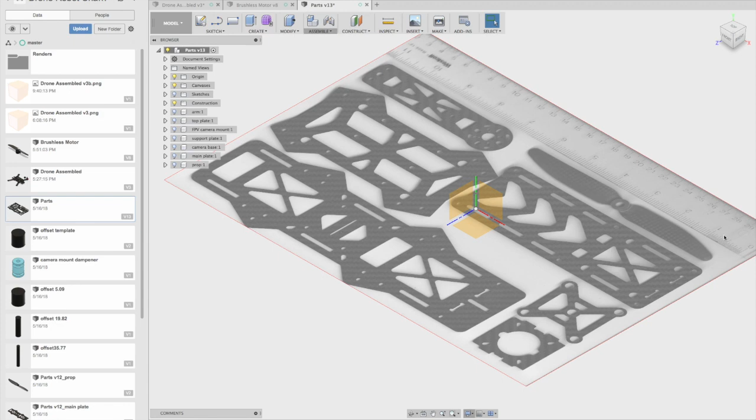So over here in Fusion, if I can get it open here. I scanned all the parts, basically all these carbon fiber parts that came with the kit, just one of each. In some cases there's many of each, but I don't need more than one. So on a scanner, I also put in a ruler for reference so that we can calibrate this image to be the right scale inside of Fusion. I'm not going to show how to do that right now, but that's just a technique.

If you know how Fusion works, you'll recognize this, it's called a canvas. So inside the canvas, I had this. Then I did some sketches on top of that. And here you can see the sketch, and I just basically traced these parts. It's pretty straightforward using all the nice sketching tools to create mirrors and repeating and stuff.

Just trying to save time. We can repeat these sorts of things and mirror one side to the other side. You'll see that each of them has a center line, which I did to help make things faster. So then after that, you just simply extrude each of the parts. In this case, it depends on what you're modeling, but this is a good way to get started.

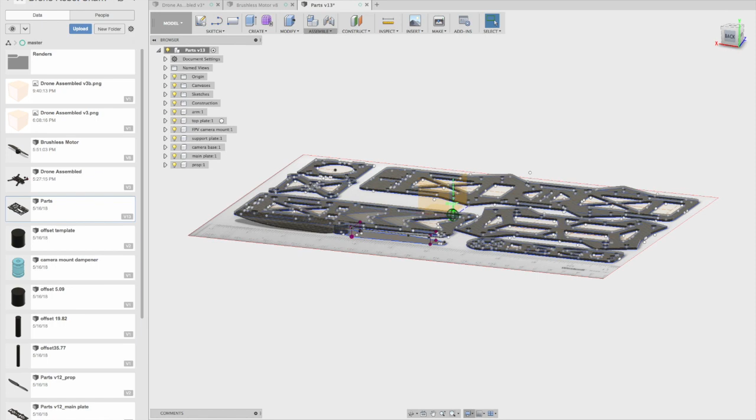Obviously, the prop was a little more complex, but I'm not going to get into that right now. So that's how that was made.

Then after these parts are made, you just go into each of these things and you make them into their own component. It's very important, you never want to leave bodies. If you've used Fusion 360, you'll know that everything's made into a body, and you can combine bodies and create an actual object. But people often think that that's an actual object in the real world, but it's not. It's just a concept for the virtual world. But you want to make everything into its own component.

Components in the browser are shown here as like a little white cube. So you see there's arm, top plate, camera mount, support plate. Each of these is a component. And in some cases, there's only one body that makes up that component, and in some cases, there could be a few bodies. Like in this case of the prop, I have the center part of the prop, I have one blade, I have another blade. They're all separate bodies, but they all are in essentially this folder, which is a component.

The components have additional properties to them. Once you have a component, you can use them as like real objects in the real world. Export them as STLs for 3D printing, or you can assemble them into assemblies, which is what this video is mostly about. So that being said, I'll show you the next stage where I will use these.

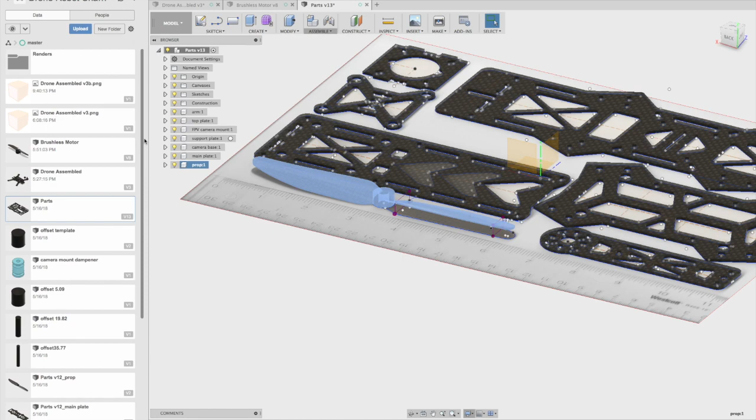So that's nice, that's it. So I'll show you the next step now.

So to start creating an assembled model using components that you have created before, first thing you do is create a new file, and it'll be called untitled, of course. You have to save it first before you can import things to it, because it's like putting one file into another file inside the cloud. It won't do it until you do that. So I'm going to give this a name, it's going to call it drone assembled. All right, so now we get this blank slate.

We can turn on the origin if we like, just to see where things are. First thing I'm going to do is go into my list of components I've created here and start bringing them in. The first one I'll bring in is the main plate, this is the main bottom plate of the drone. So you right click on that file.

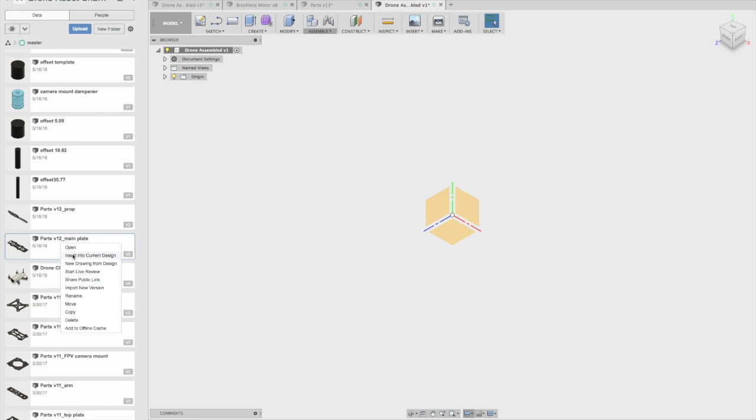And say insert into current design. And there it is. So now once it comes in, you can leave it where it lands. In this case, it's a little off center. You know, you can move it to the center. It doesn't really matter, so I'll leave it there.

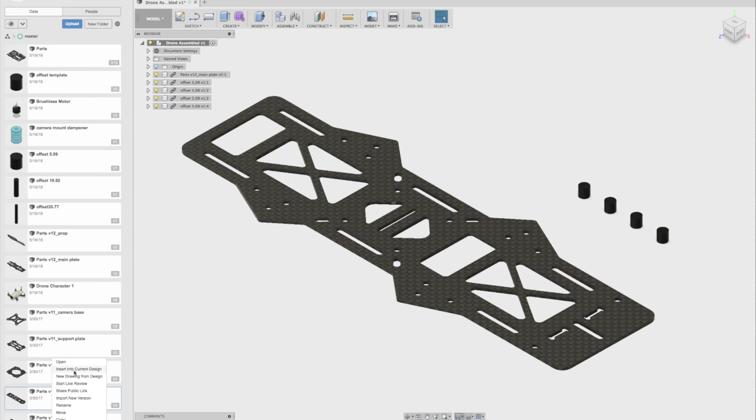All right, just brought in a component, one of the arms. I already have the base plate and the offsets, which are aluminum tubes. They're called offsets. So I need 4 of these arms, so I'm going to just duplicate this one by copying and pasting.

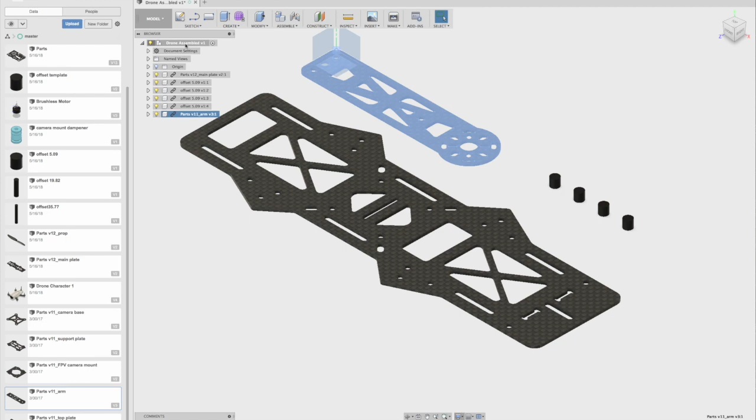So it puts it there. I'm going to move the new one out of the way a bit. And what I'm going to do is put these arms into their spots. So these screws here go to these screws here, and it'll form an X shape.

After that we'll use these spacers. So we go into Assemble, Joint. I'm going to pick the component I want to move first and the second component second, and pick a reference point where they'll be anchored. The best anchoring spot will be this little hole for the drill or for the screw.

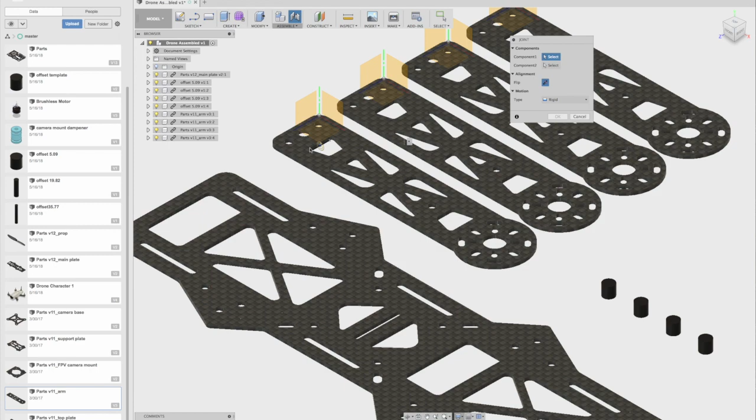So I pick on the side that's going to be touching the other part. This is going to be underneath this part, the arm underneath the plate. So I'm going to pick the top corner screw hole on the top. Now it goes invisible because it's been selected.

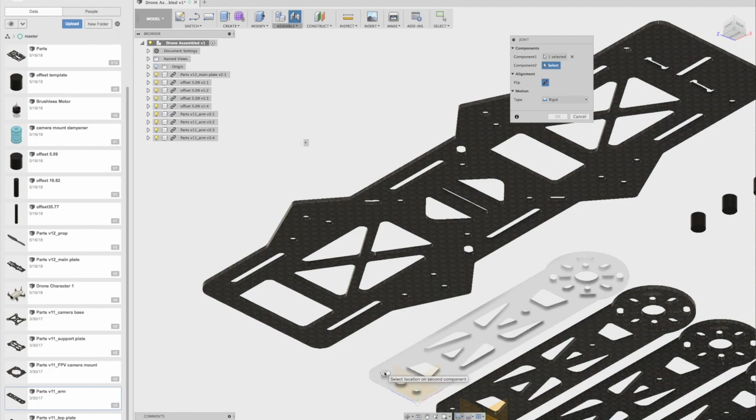Now I'm going to go under the other part, and this connection is going to go from here onto this one on the underside. So I click there, and it makes a little circle icon, but you want to make sure you get that surface, not the one in the back, because you could pick that, but we don't want that. We want the surface on this side. Click it, and now it joins.

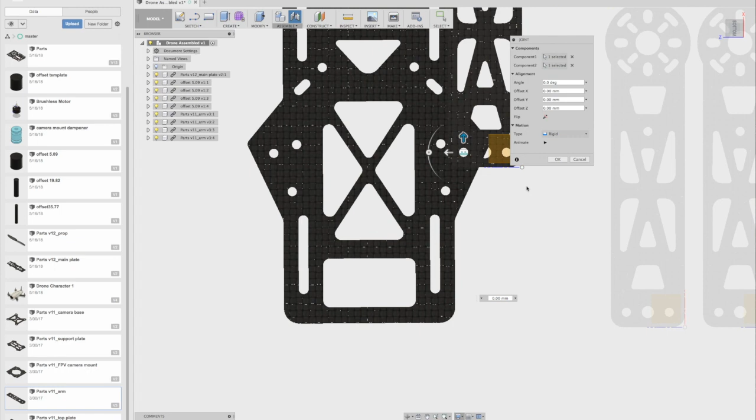And the orientation is wrong, so now we have the opportunity to fix that. We'll turn it. And luckily the angle is one of the standard angles, so it just snapped.

You can only have one connection point per part, otherwise the computer will get really upset because it might not be exact and it will be confused—at least that's my experience. So it's called a rigid joint. There's rigid joints, but there's also other animated joint types, like revolute, sliders, etc., but we're not using those. So you say okay, now it's joined. That is a joint, 2 components joined.

And so we just repeat that with the rest. That's it, I'll continue with the rest, but it's essentially the same idea. You keep adding pieces and attaching them.

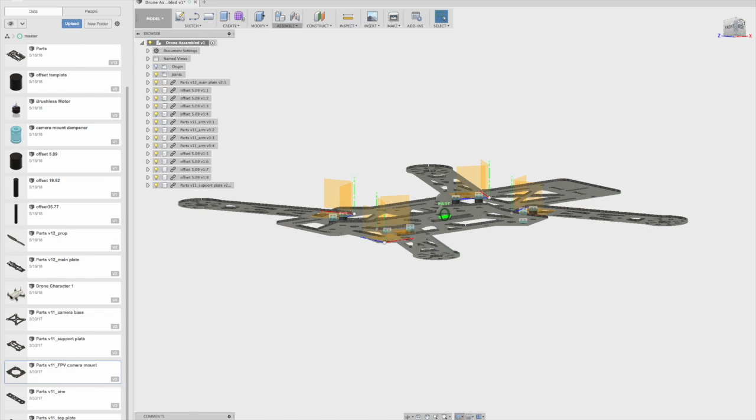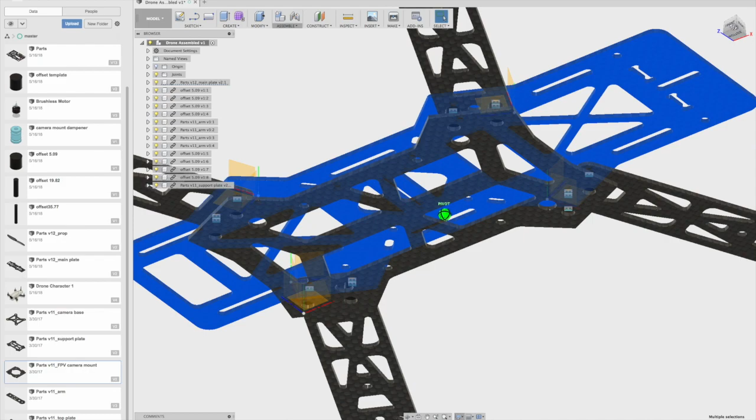Okay, so I've added the offsets, and then I've added this base plate by attaching it to just one of the offsets. I took one of the holes and attached it to one of the offsets because for the program's purpose it only needs one connection point, even though in reality there's 8 connection points. Then I just oriented the base plate to line up with the top plate. So now we've got that done so far.

The next thing we're going to do is bring in some more parts. You can see over here I've built all the parts separately, just like a catalog, and I can bring them in. So this is the plate that goes in the front over here on the left lower side. It's called a camera mount. That's the first person view camera.

So I right click and say insert into current design, and it's chugging away. There it is, just move it someplace where you can get to it. Now what's going to happen is these little tabs on the end are going to stick into these tabs here. So this thing's going to go horizontal, going to go vertical, a different orientation than it is now, but that's not a problem. So let's see if I can work this out.

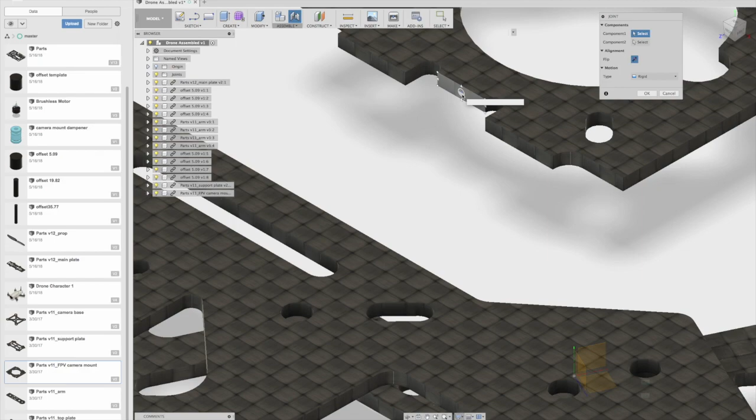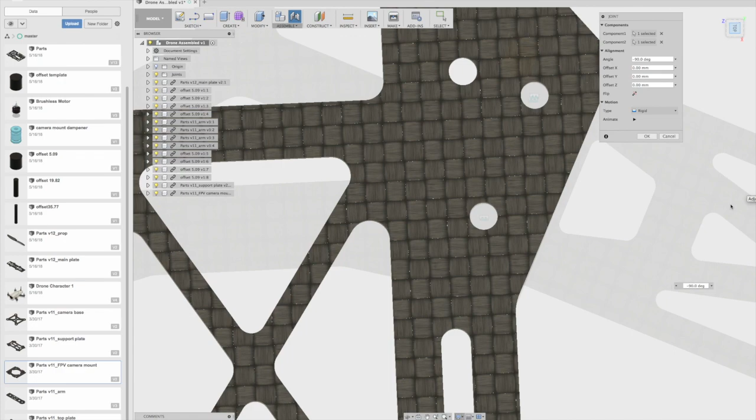Center there. And then, oh, I had the, okay, there. Now its orientation is upside down, so I can flip it. There we go, now it's flipped. Then I also need to turn it. And there it is, it looks pretty good.

I could nudge it a little bit more towards center, but I think that's pretty good for this purpose. There it is.

So the next thing we need is these tall offsets. I need 6 of them, so right-click, insert into current design. It's cooking away, there it is. We're going to copy and paste that 5 more times. Copy. That's 6, all right.

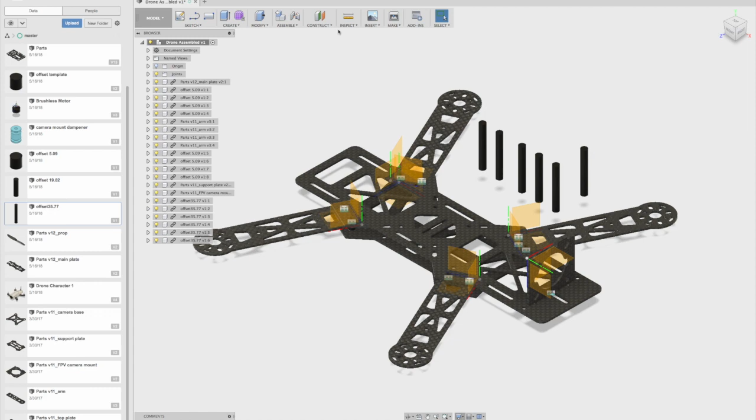Assemble joint. Pick the connection point on the offset, bump. And then pick, whoops, this one. Donk. Repeat joint.

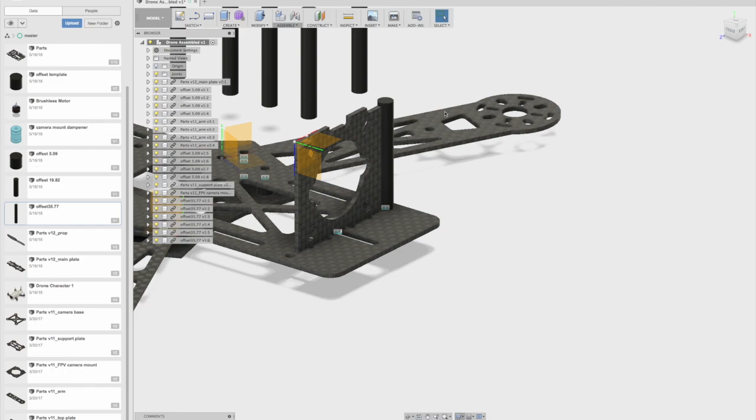All right, I'm going to save it. How about that?

All right, now bring in the top plate, which is this one down here, lower left. This is the top plate, looking at it in the real one in my hand. Insert into current design. Right, move it out of the way.

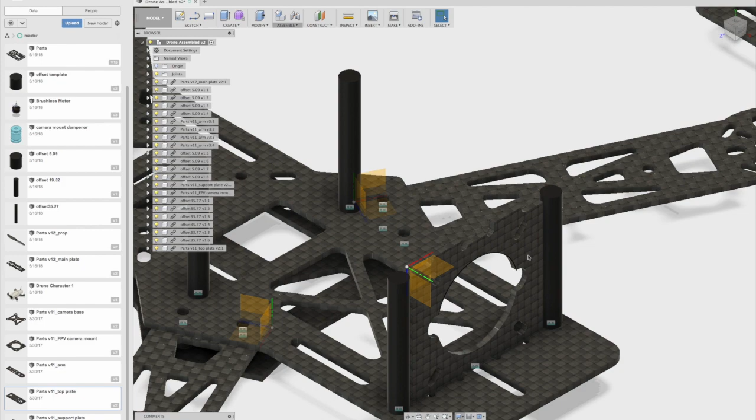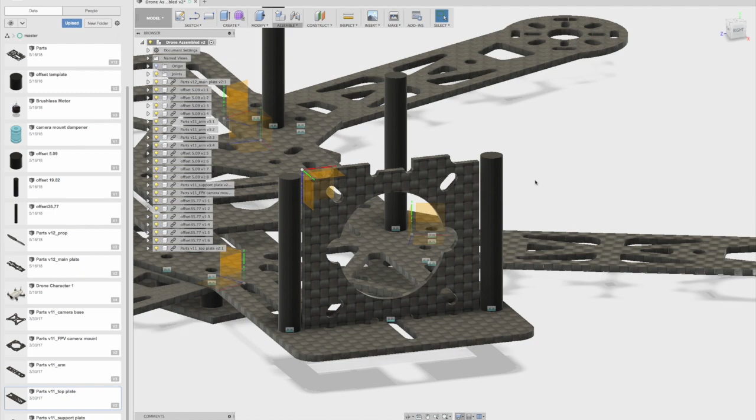Now I can attach to any one of these offsets, or you can even use this little camera mount, because I didn't design them perfectly. Oh, maybe that's just the way it is. So this thing has a little play in it for some reason, the way it's cut. So the offsets are a little taller, so we'll definitely mount to the offsets, because that's how it would be in true life, and this thing kind of floats. I guess you need to put some sort of glue or something to hold those tabs, but it's not my mistake, it's the way it was designed.

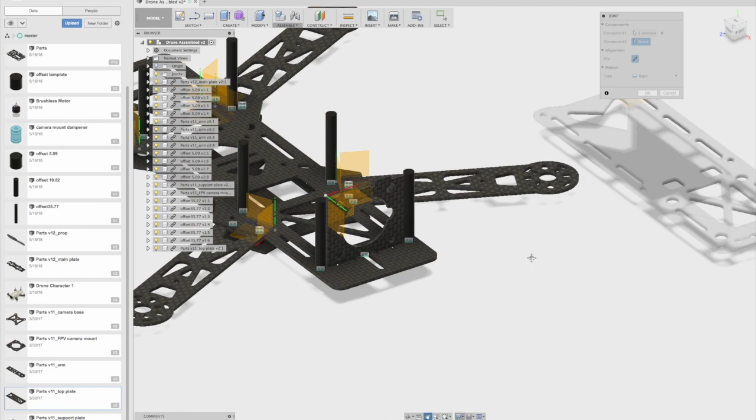So let's go over here, do another joint, and I only need to use one reference point, so I'll just pick the lower front corner, pick there, and then put it on top of this one. Flies over. Maintain the right orientation, so I don't need to twist it or anything, but there it is. It looks like it's where it needs to be.

Okay. And that's the basics of that.

Next, we can bring in the motors, which are here. Brushless motor.

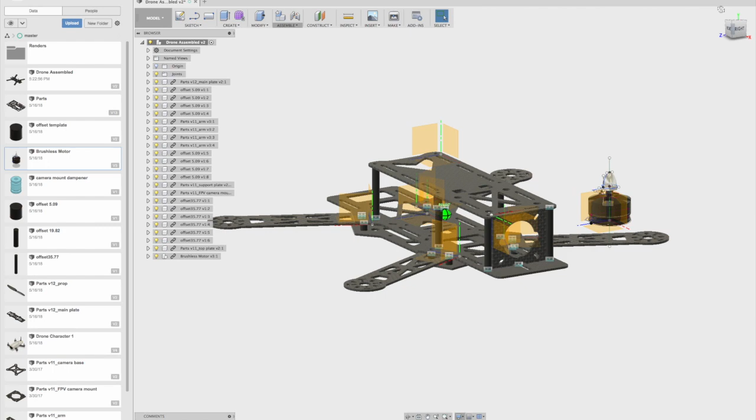All right, obviously those are pretty obvious where those go. They go on the ends here, so make a joint.

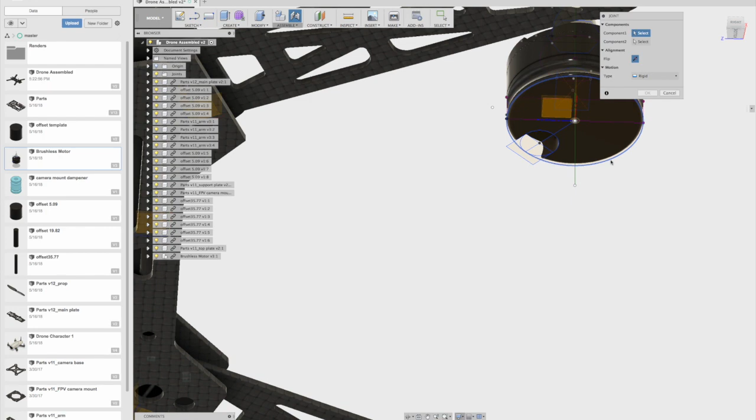Center the bottom of the engine. Boom. Whoops. Yep, I think that's... no, I picked the side. That's wrong. So that's wrong. You want to get it has to be on the same plane. For some reason, it'll maybe go on a different plane. So you can pick, well, I can pick the rim, and it'll still give me that center target. So anything that kind of references it.

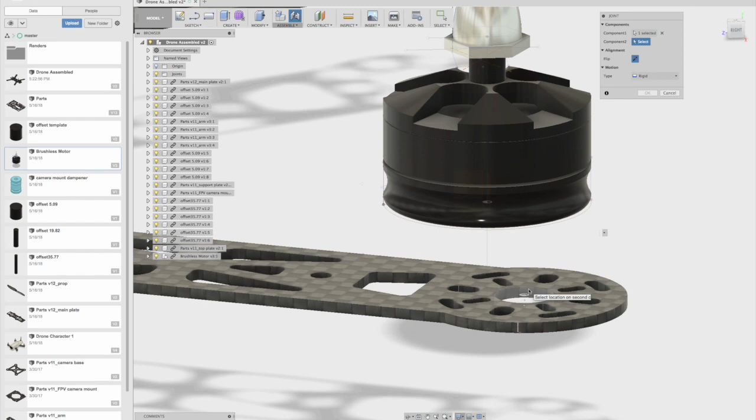So we'll pick that, and then we'll pick the center of this on top, and there it goes. Oops, what happened? Huh. Didn't work, let's try again. Oh, huh.

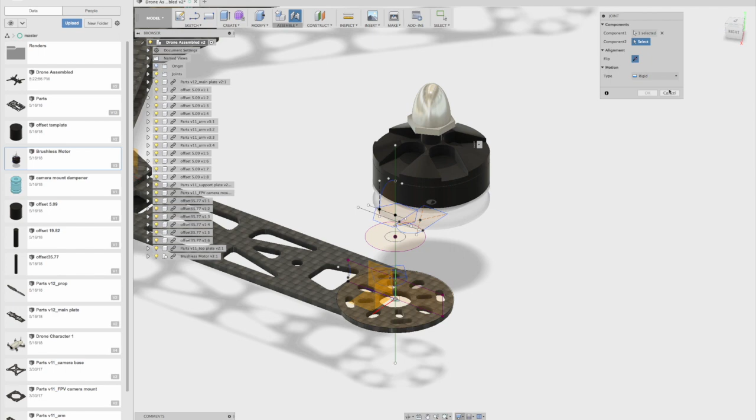Well, that's because the motor is made out of many components in the other file, the external file where I built this. So it looks like it's... I'm not sure why it's doing that. It's wanting to pull it. It's trying to pull the one object without the rest, and that's probably confusing it. So let's see what happens.

Okay, that went. Oh. Now that's because, the reason this happened is because this motor in its own file has not been joined yet. So I'm just sort of pulling it apart over here. Now I can fix that.

I'm going to save this. This is a fun experiment. So I'm going to leave this alone because this base is where it's supposed to be, and I'm going to go back into the file that has this and attach it. Attach the components over there, and then hopefully when I update over here, this should come back together. So let's go over to that file, the brushless motor.

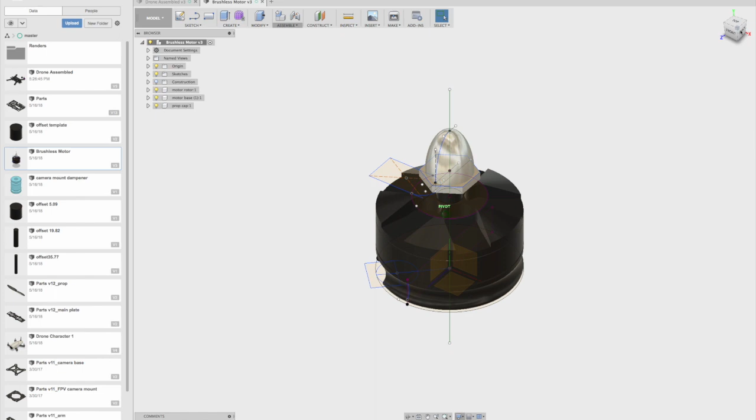And so there's joints, so these are just sort of sitting in the right spot. There's another thing here called make a joint as built, which is a little easier. If you already have things where you want it, you don't want to mess around, you can just do it this way. So you can see over here I got all of them componentized. I don't have any floating bodies. You see there's no bodies folder because everything's been put into a component.

So I got the rotor, which is this part that spins on top. I got the motor base, and I have the prop cap. So normally the prop would go on here. In fact, we should probably bring the propeller in here and stick it on. Definitely that could be a good idea. We can do that later in an update.

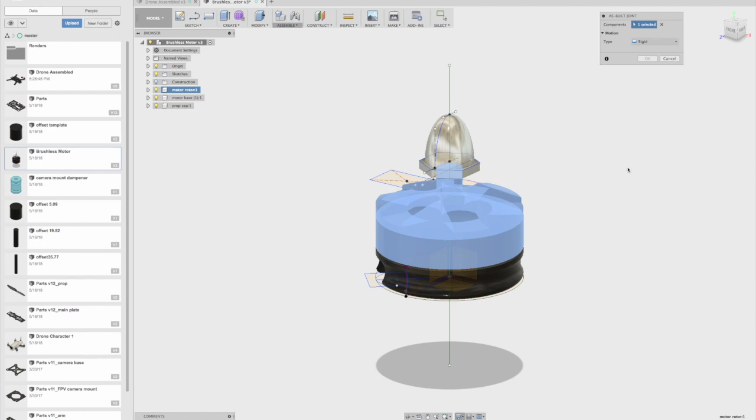But for now I'm just going to join these things. So first I'm going to do an as-built joint. This one first, and then this one second. Okay, they're joined. I'm going to do it again. I'm going to pick the cap first. Whoops. And then this second. Okay, those are joined. Now let's save it.

Before I leave, you can see there's a new folder called Joints. See, there's two joints we just made. So let's go back over to this one.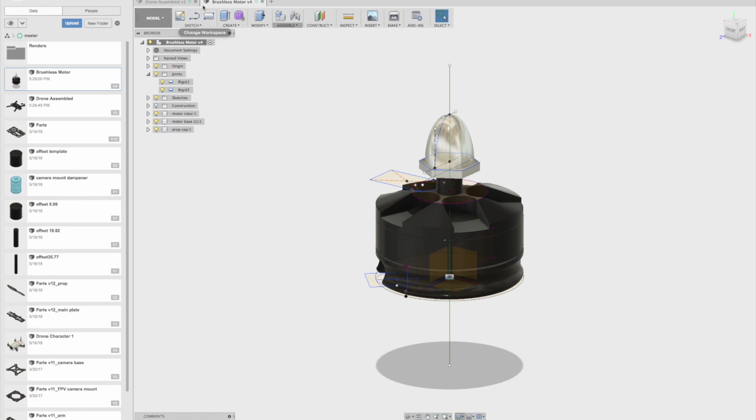Here you see the brushless motor says this component is out of date, update to the latest version. So you right click on it, get latest. Hopefully this will all pop together. Done. Cool, huh? Now this is up to date, we can copy and paste it.

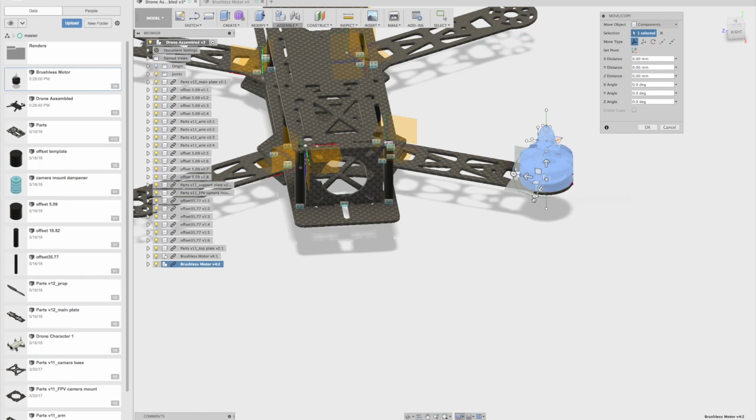My joints. Let's pick the surface, and this previous file, the sketches will be on when you import it. So in the other file, I already can see a mistake in my engine. I forgot this little notch. I want to do a circular pattern on it.

That's just, I can go update that in the other file, and then it'll update here. So we'll do that later. But repeat joint. So let's try this again.

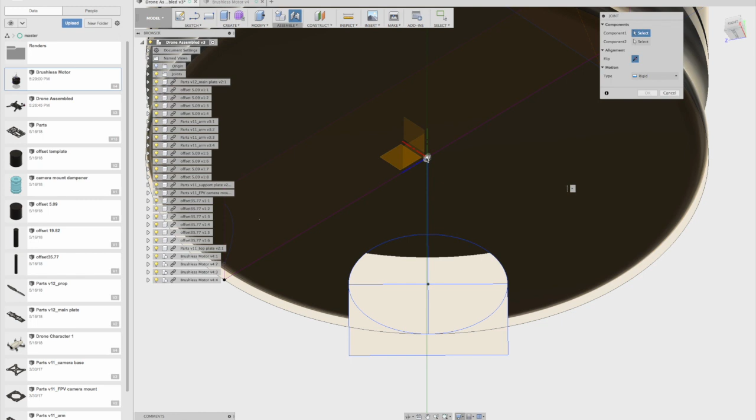I think I picked the actual sketch and not the physical object. So this time we'll make sure. Make sure to get the actual object. That's not it, that's the sketch. You can see it's extending past the actual object.

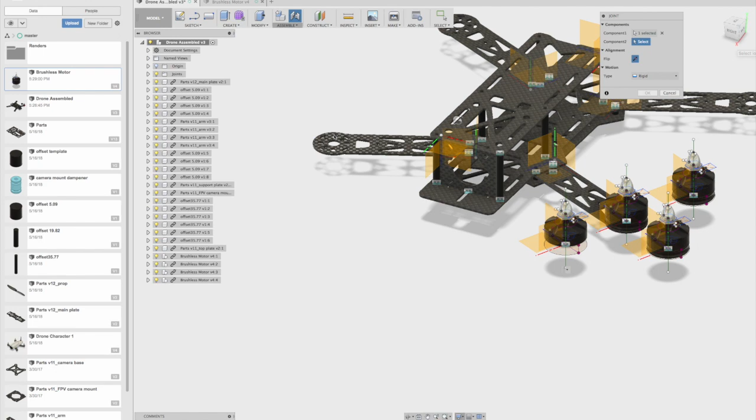So maybe that. Yeah, see how it went invisible? That means I've selected that object. That's good. Now I'm going to go back here, put it there. Okay, now it moved that part, and then the rest of it followed because they're joints, they're joined to that.

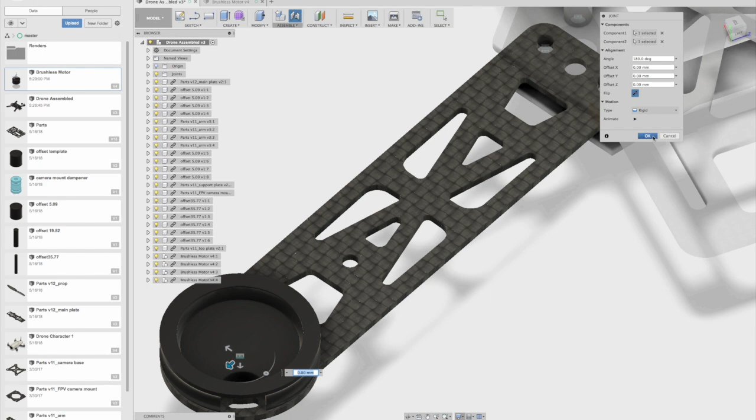So go back over here. Let's do it again. All right, everything looked good. Stop the video for now.

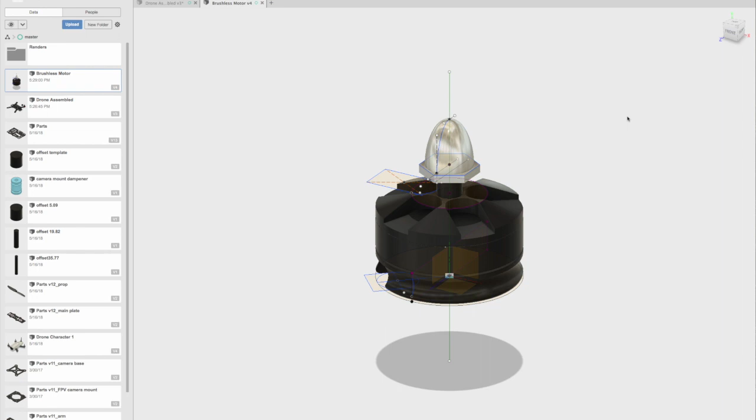In the previous video, I talked briefly about the motor having a mistake in it, and also the sketches kind of showing up when it was imported. So I'm going to fix those two things and update it. First of all, this little feature here, this cutout, in reality is 3 of them. So I'm just going to do a real quick modeling thing here to fix that.

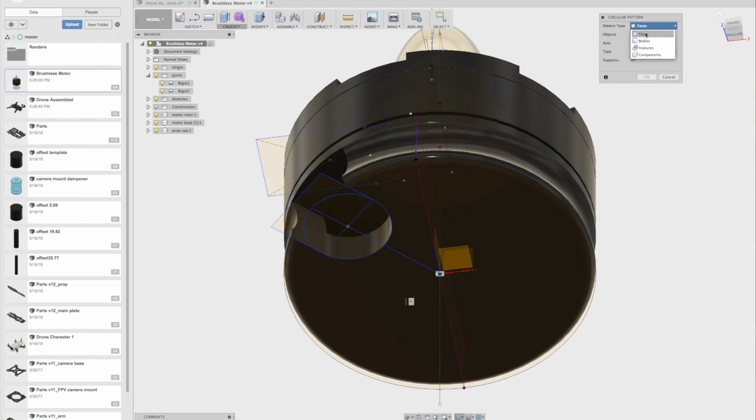So what I do is go to create a pattern, circular pattern. Now I can pick bodies, features, faces, components to rotate a pattern. I'm going to pick faces in this case because it's like a cutout. So I'm going to pick all these interior faces that are part of the cut. Fusion's smart enough to know this is a cut, and we'll just magically make this work.

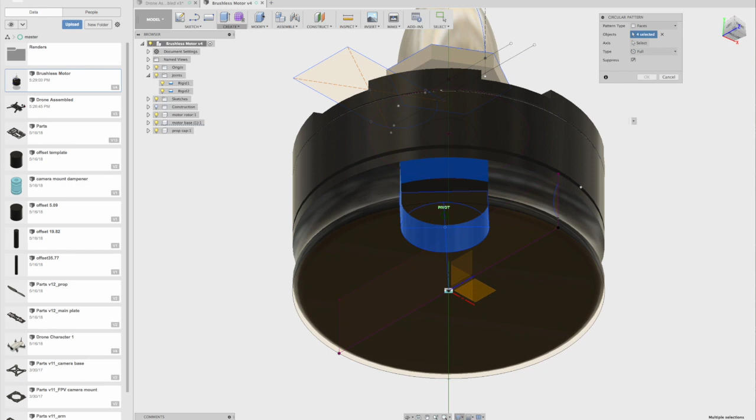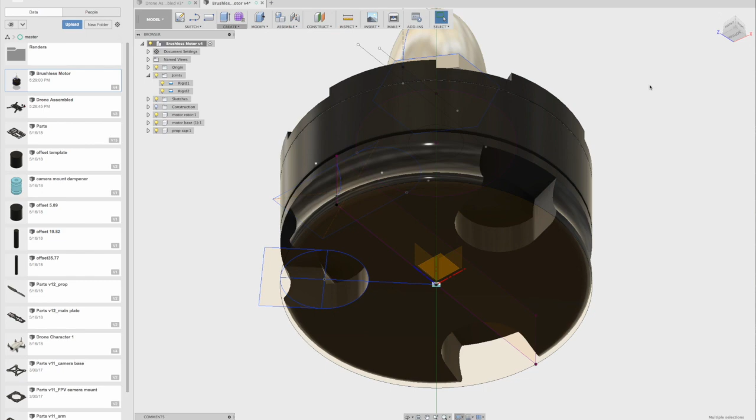I think probably should pick that too. I think it would probably figure that out, but let's make sure. Pick that. So the axis is going to be the center axis, the Z axis, which is this, I think. And we want 3 of them. It's not previewing very well, but I think it'll work.

So now we got 3 of those. So that's fixed, that's repaired. I'll turn off the sketches because they're annoying. Do a save. Since this is going to have props, to make this easier, I'm going to add the props which...

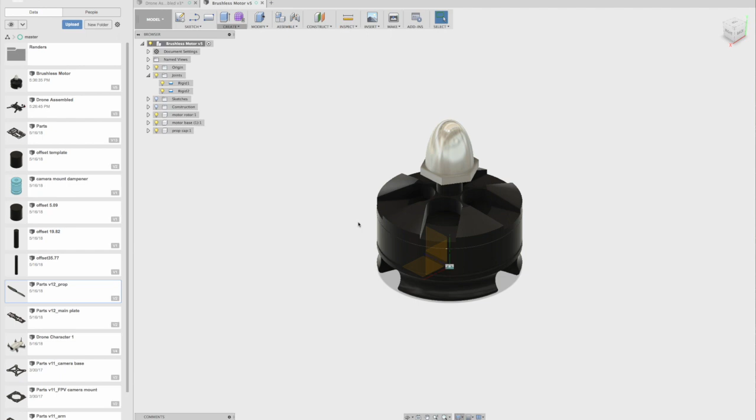I built over here on the left. We'll import them here and assemble it here onto this piece, and that way we won't have to deal with it later. All right, insert into current design.

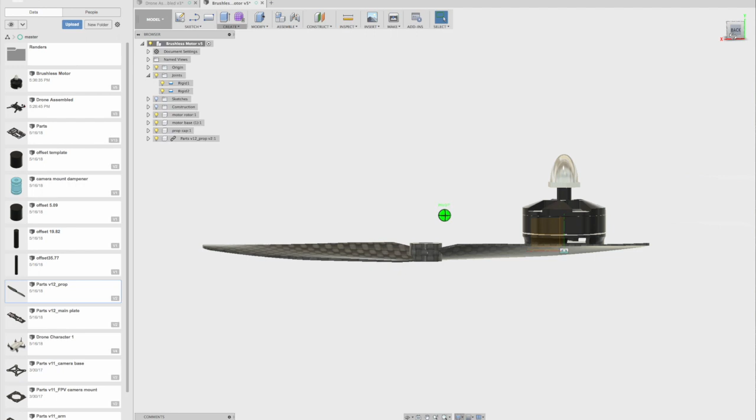I assumed it, I just took these. I modeled these parts off the real parts, so I'm assuming that the height of this thing is the same as that gap. May or may not be, but in reality they would be probably. I don't know where they sit. Probably sit right there, I'm just going to assume that's how it works.

Assemble joint, rigid joint. Actually, you could say I want to do a revolute joint, but that would allow this thing to spin. You could animate the prop spinning around this pin here, but in reality that doesn't spin. This is all a rigid thing. This part here is the rotor that spins. So I guess we could convert that joint to be a revolute.

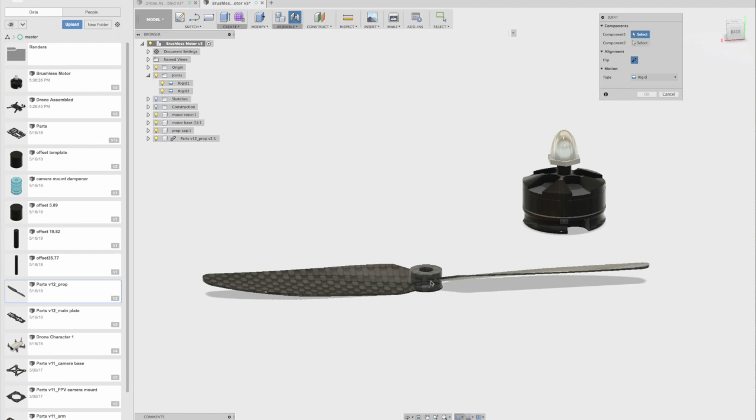We'll do that actually, that makes sense. I'll change that, I think. Yeah, I'll change that. But this one attached to this one is a rigid. So we're going to pick the bottom side of this in the center, and then I'm going to stick it right on this spot here, and there it goes.

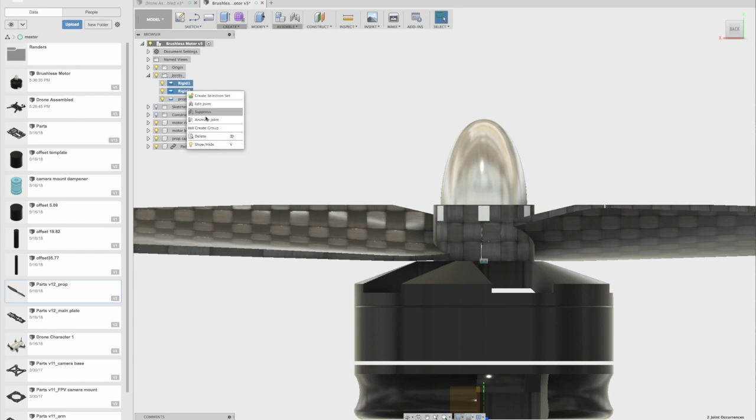Yeah, it looks like in reality this cap screws on after you put this on. So both these joints I made are bad previously, so we're just going to destroy those. This third joint, you can name it. So I'm going to say that's the prop to rotor joint. These other 2 joints I'm going to delete because they're messed up. Excuse my language. All right.

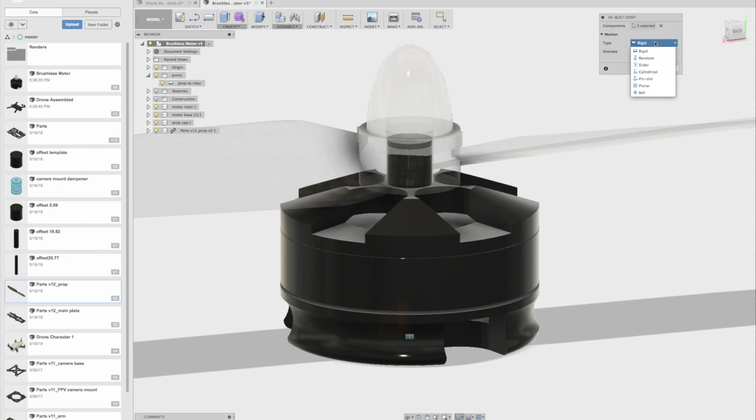So, as-built joint. Now, with an as-built joint, you don't have to position anything. But this time we're going to attach this to the base, and we're going to make it revolute, which means... wait a minute, I guess you can't do it as-built in that case.

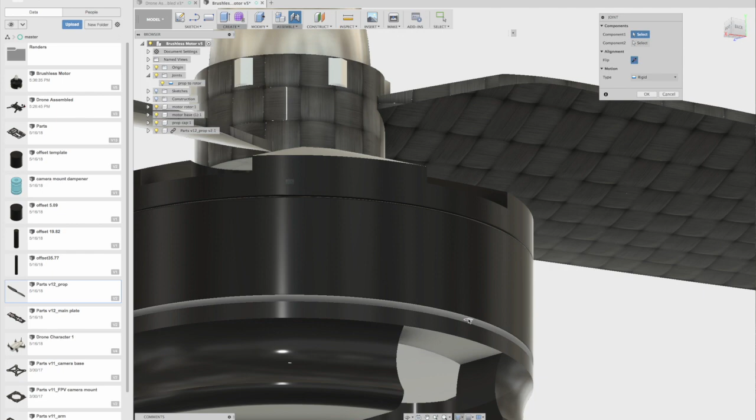We'll do it like this. So we'll do a joint again, and like we did in the other types, we're going to pick a feature to attach. So I'm going to pick this inner edge, attach it to...

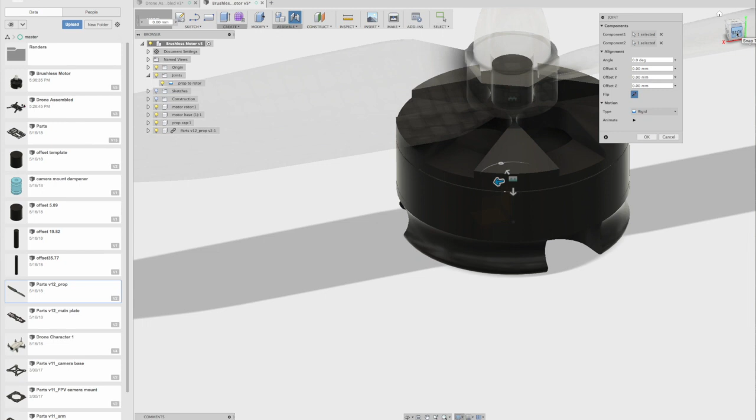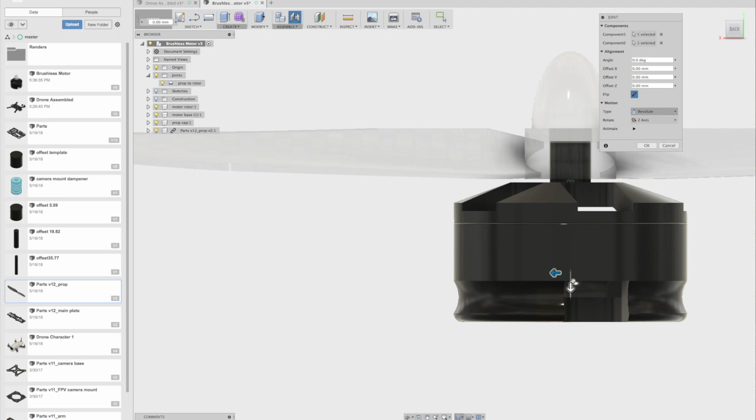But like I said, we're going to make it a revolute. So now it spins. However, that's the wrong one. Excuse me, wrong. Wait, no, it is correct. So wait, where's the joint? Yeah, it's down there, down at the bottom. So everything's fine, we can animate it again. So what's spinning is this, not just the top, but this base part's spinning as well. You just can't tell, but it's animating for your enjoyment. You can stop anytime you want, and that's good.

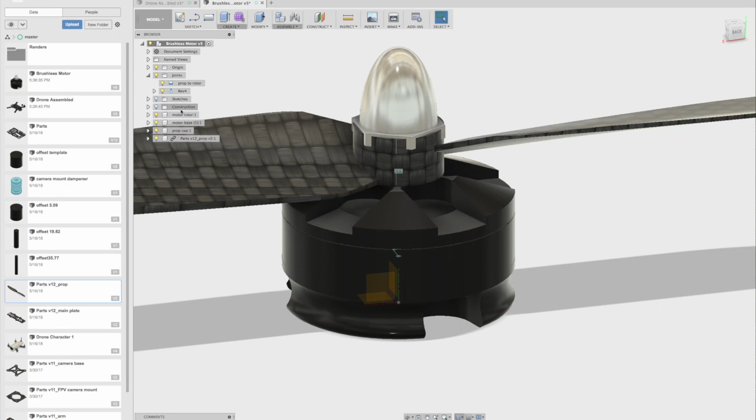Next thing we want to do is move. I'm going to place this top nut correctly on top of where it would be. So for fun, we can move it. Motor base, prop cap. I'm going to move it just for fun out of the way. Hopefully, okay. I guess the pin — I'm going to turn off the prop for a second.

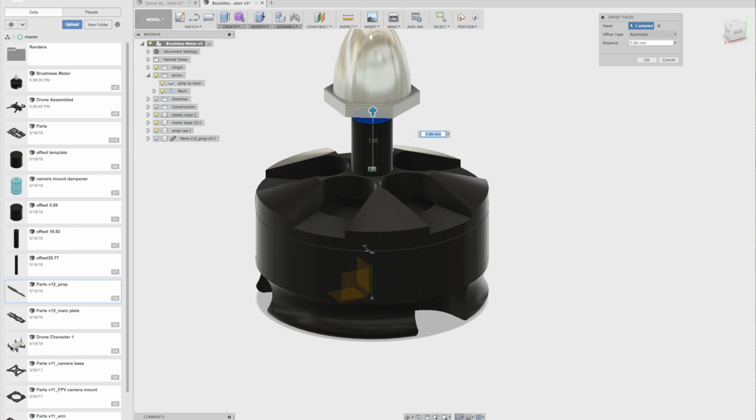This little pin probably should be much longer, so I'm going to adjust that, pull this up a bit so it extends past the prop. I would assume — I haven't looked at the motors underneath, but I assume it's something like this, though I don't really care too much. Anyway, in reality it would go up inside.

So let's turn on the prop, and then we're going to do another joint. It's going to be a rigid joint, capture position, yeah. That's because when you move something and do joints, it likes to make sure you're okay with the new positioning. It's whatever, let's not worry about that too much.

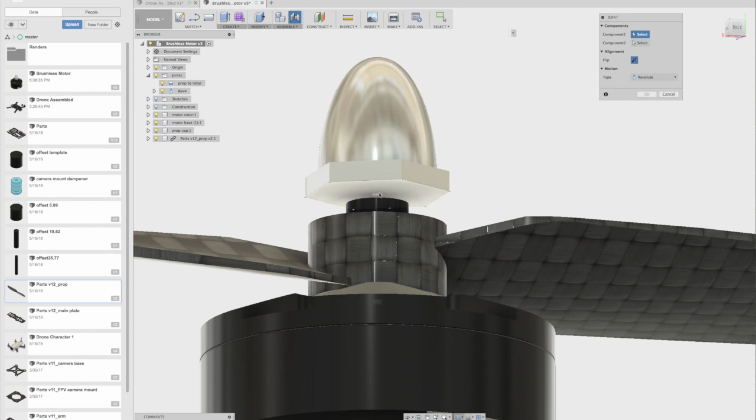Pick the center of this thing. So even though this is a, what do you call it, hexagon — not hexagon, six-sided — it can kind of figure out the center. So there's the center of that. And you would think I might want to stick it on top of this, but that's going to go inside. So I'm going to pick the top of the prop just for a reference point, because that's where it would screw down to in the real world.

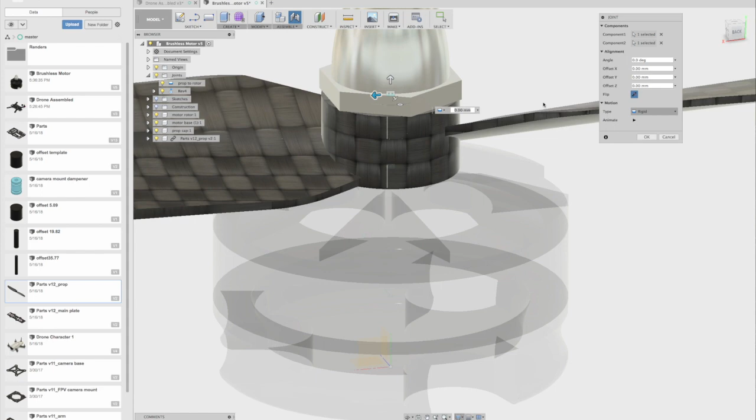And there it goes — it's still going revolute, because that's what I did last time. I don't want revolute, go back to rigid. So it's rigid, everything's rigid. All right, there's the motor. It's been fixed with the feature added in the circle. We got the joints revolute and the props on there. Everything looks good. We'll save it.

Go back over here to the assembled drone. You can still see all the garbage from before, and the props are not showing. And it says here, hey, one component's out of date. Yes, I know, lots of them are. So we pick all these, right click, and say get latest. Maybe you have to do it one at a time.

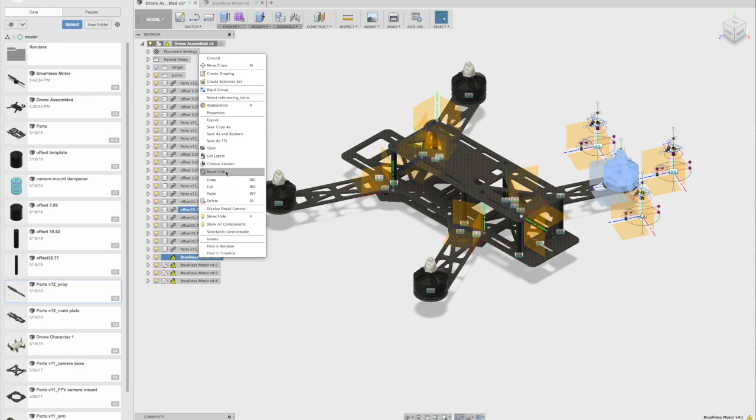Maybe, all right, right click, get latest. You've got to do it one at a time. That's annoying, but whatever. Oh no, I did it once and it did them all. Okay, cool, so now all the props and the motors and the caps and everything are here. Looks good.

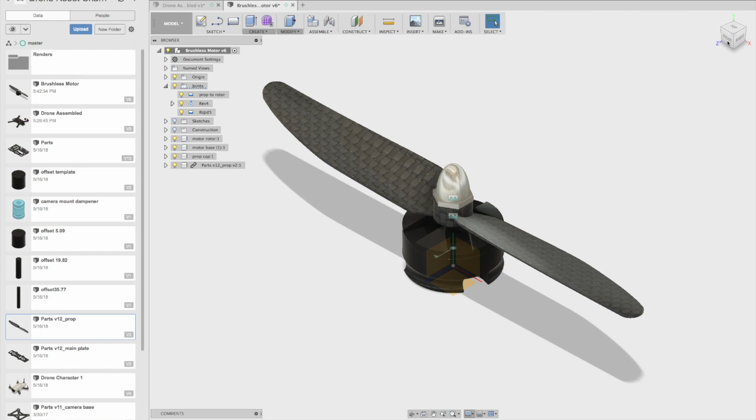Okay, in the last film I put the props on, and I noticed afterwards that the prop is upside down. Subtle thing, but the curve should be going the other way to push the air downward. So I can change that by editing the joint.

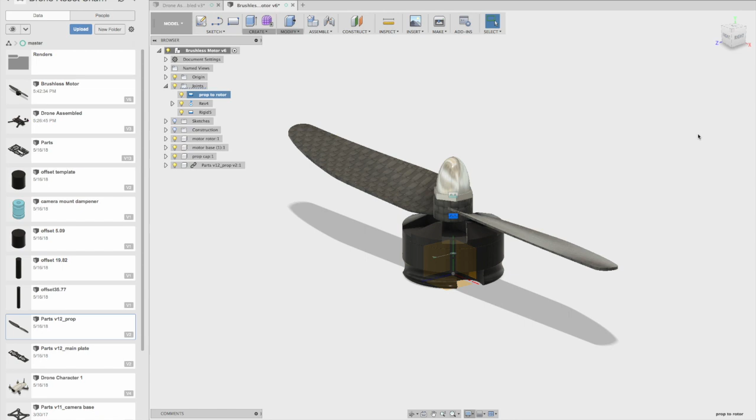So I've got my prop-to-rotor joint, which I named conveniently. So we double click that, maybe edit joint. Okay, so now we're going to redo this. I'm going to pick the other side. The second one's fine, but the first one, which is the prop, I'm going to get rid of. And then this time I'm going to pick the top here.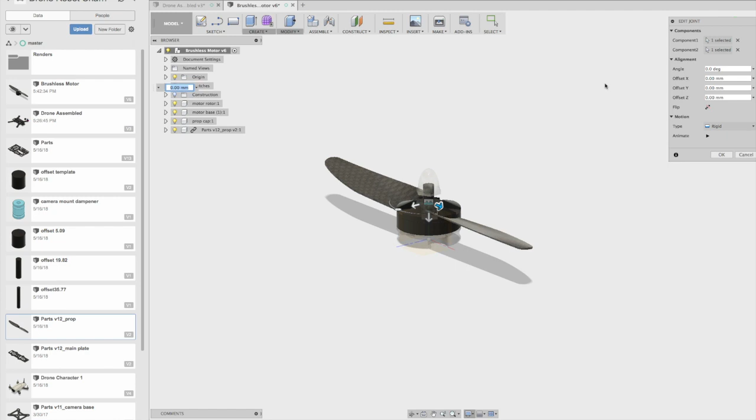And then it's going to attach that. But you can see, what's going on here? It's gone low because I put that same surface to that other surface, but I want to flip it. So they have a tool here called flip.

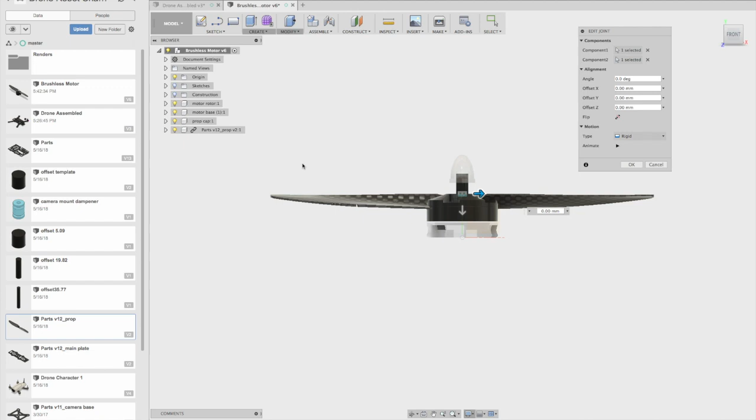So there's a lot of tools here to adjust your attachment point once you've got it there. Those little targets are convenient — they usually work 90% of the time, 95% of the time. Once in a while you've got to manually get it in there or tweak things. So here, tweak it, boom. Now it's in there, see?

And hopefully this all works. Okay, now that messed up the second joint, which is the cap, right? This one, because now it's attaching the cap to that other surface. What it's supposed to do is now the cap is upside down. So let's destroy that, or edit that. Whoops, what the hell?

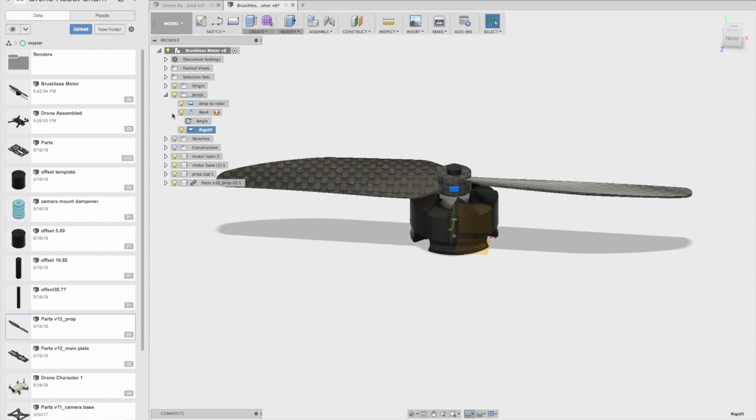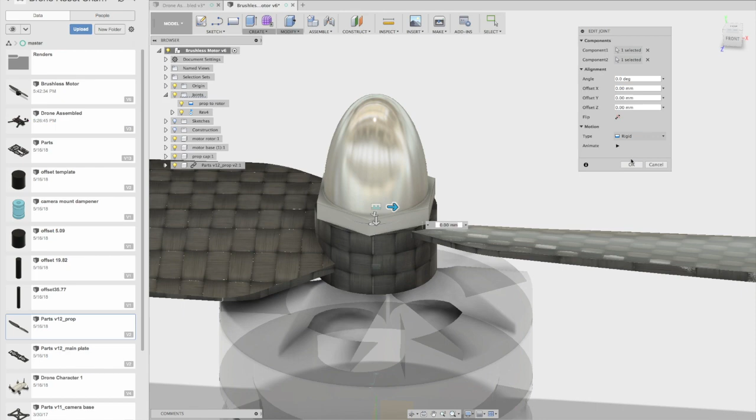What is this? Oh, okay - edit joint. That means the second attachment point, the first one is the cap, the second one is the blade. So we're going to fix the second one, and I'm going to pick this surface this time. What the hell? Oh yeah, it did it upside down again. Flip it. There we go. So now this is fixed.

Okay, here we are back at the assembled drone. In the previous film, I updated the orientation of the props and had to adjust the caps we saw, and now they're out of date again. So we're going to come back in here and do an update. Right click on that component, the brushless motor assembly, and say get latest, and then magically this should all switch. See, all switched. Everything's nice.

Alright, I made these little blue dampeners here, and there's a little plate that sits on top of those, and that's where you could put an additional camera, a first-person view camera, on these drones. There's like a - well that's not first-person view, that's like a high-end GoPro or something. People like to put that on just to film it and post it on YouTube and make nice films, because the first-person view cameras are not the best resolution. So that's an optional feature. I just have it here.

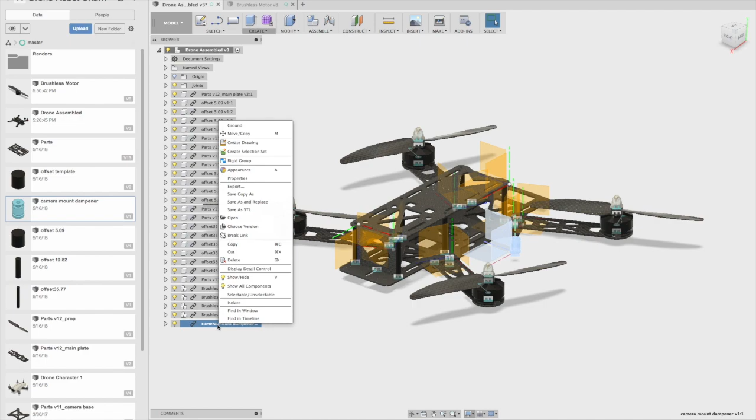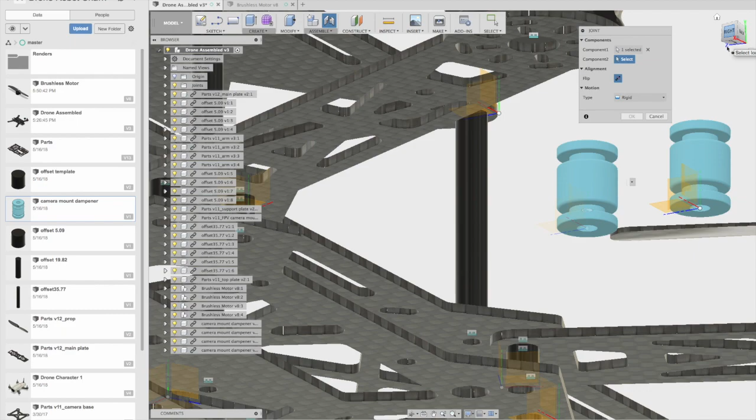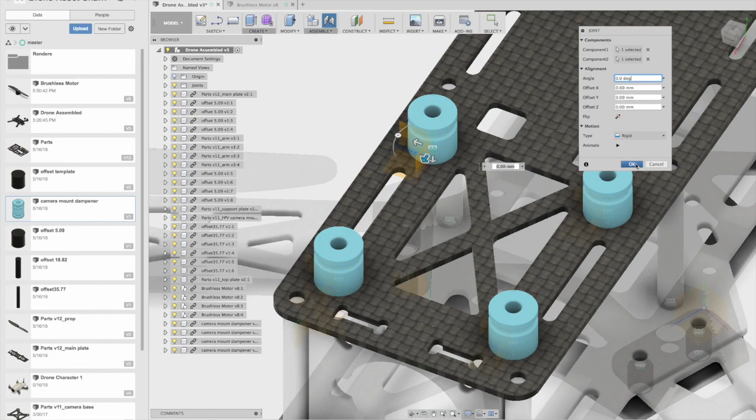I'll put it in. So we're going to bring in these dampeners, insert into current design. There are these little blue things, let's put those out of the way. Again, we'll make 4 of them. Copy. So these go up in these little fat holes here, and they kind of sit in these little notches inside. So let's do a joint, and I'm going to pick this inside rim right there - that's where it's going to sit. And then put it up here. There it goes, that's how it would look more or less in the real world. Okay, those are all done.

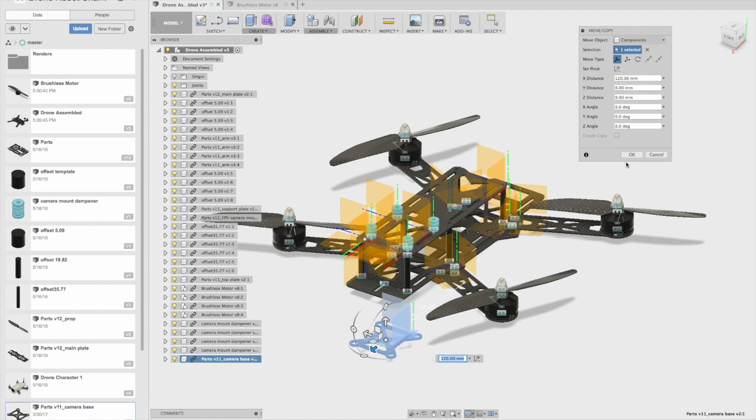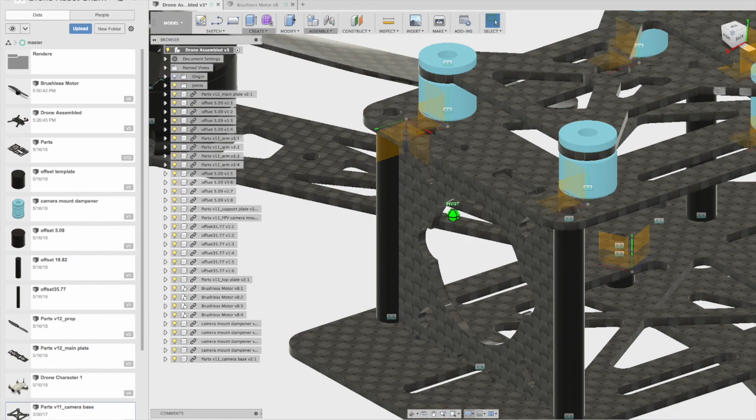The little rubber dampeners / attachment grommet things, those are done. I'm going to go get the camera plate, which is this guy over here in the lower left. Insert into current design, and there she is, sitting there. Alright, you can pick the top or bottom because it goes in that slot. So I'm going to pick this top corner here, and stick it right in that spot, and that looks good. So this thing is pretty much done. There's the drone assembled.

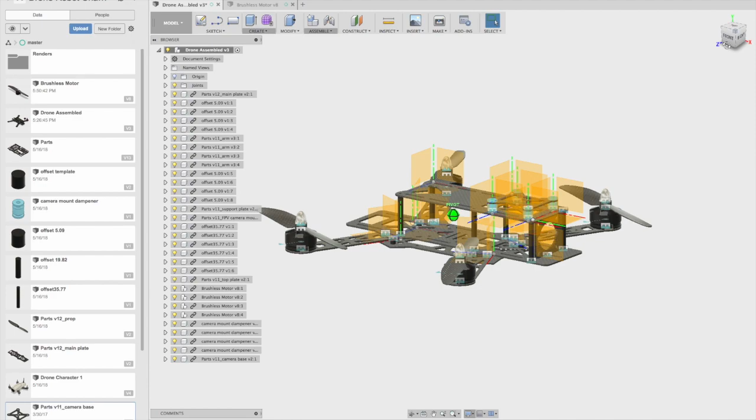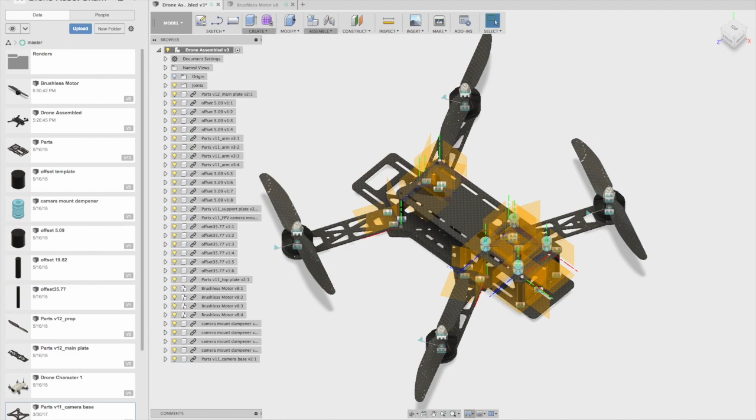Pretty cool, huh? Yeah, so I was going to use this now because basically this is a model of the real parts that I got when I bought this kit, and I'm going to build my own covering and fairings, I guess you call them, to fit on here, and then we'll 3D print those. So now that I have this virtual copy of my actual hardware, I can design some virtual hardware and then translate it into real hardware, and do holes for the screws or whatever else, and vents for the ESCs, which sit on top of the wings that need cooling. So we'll have that - might have some streamlined, cool-looking fairing stuff, and that's the whole point of this.

And that's about it. Just for fun, as a reward, I always like to give myself a little fun render. So let's do a little render. Yeah, Fusion cooks away at this, takes its time, but looks cool at the end.

So anyway, this program is called Fusion 360, it's by Autodesk. It's free to use non-commercially for hobbyists like me. It's a pretty good program - actually a very good program, especially for being free. It can do all this sort of stuff, it can do STLs for 3D printing, it can do milling paths for using a CNC machine, which I use once in a while. It's a great tool. When it doesn't crash, it's great - it crashes once in a while. It's kind of a little buggy program they keep changing and adding to, which is nice. It's an organic thing, every few months you get new features, which are fun. And I like it. There it goes.

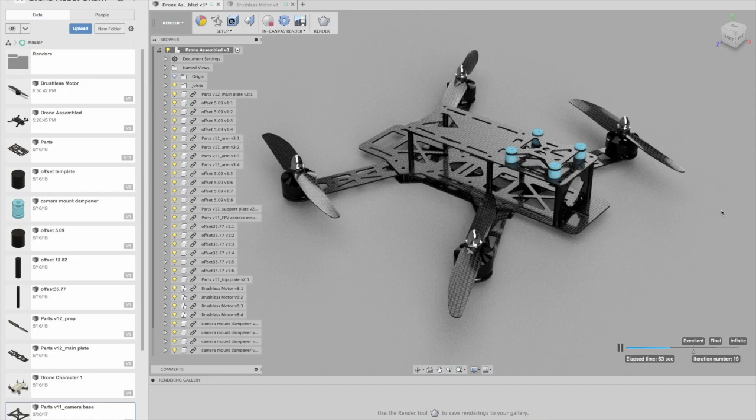I've gotten pretty decent at this stuff, I guess I should probably share my knowledge. And that's it, talk to you later.